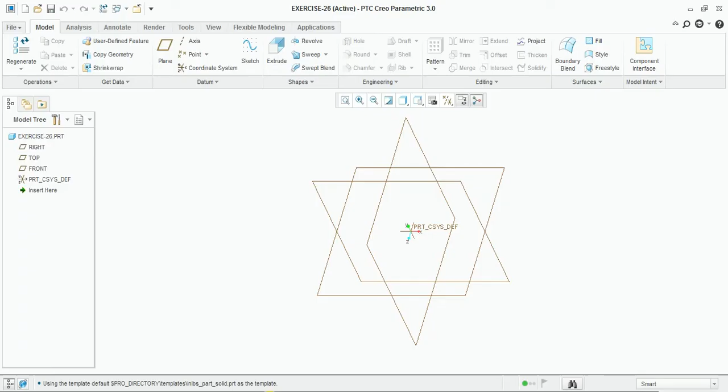Select sketch, select this plane. Okay, now draw the rectangle, dimension is 60 mm. Half of 60.

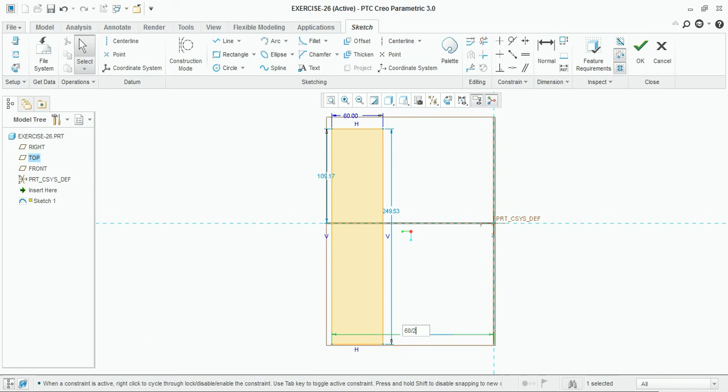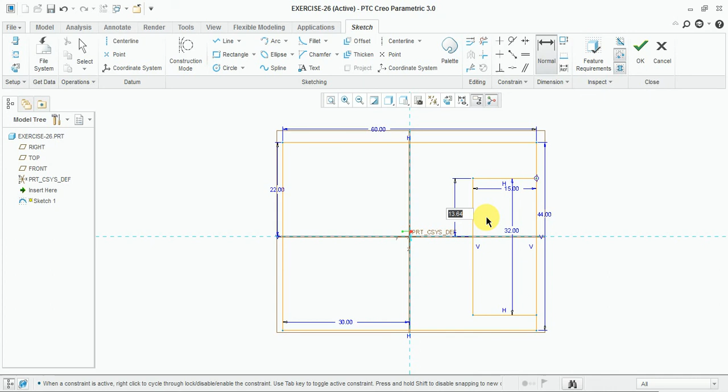Now make another rectangle. Here the slot is given. The dimension of this slot is 32 and height is 15 mm. 32 mm, height is 15 mm. Take into center, 32 divided by 2.

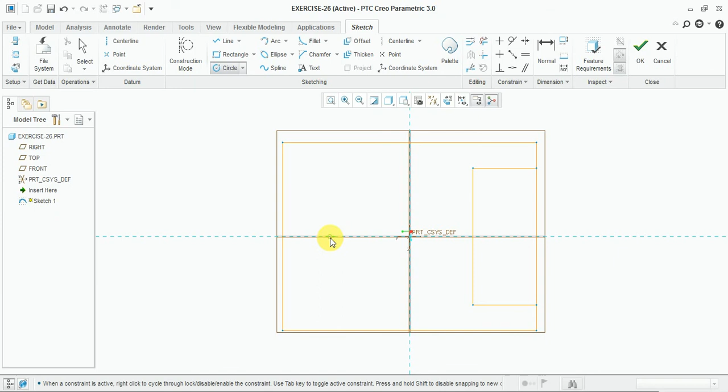Now draw this hole, diameter is given 30 mm and hole center from the bottom edge is 38 mm. Select the circle. 30 mm diameter and center from the bottom edge is 38 mm.

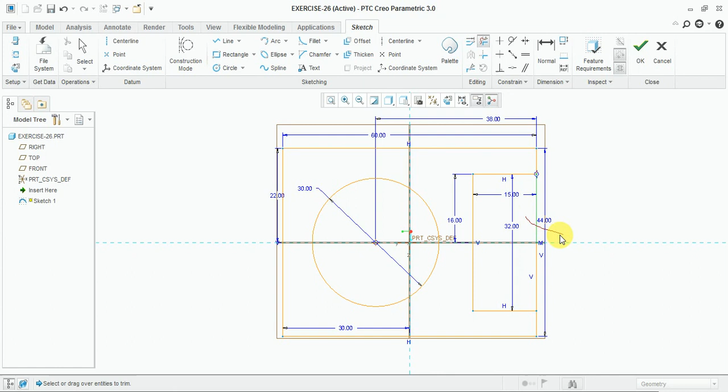Select the trim, cut this line and make the close sketch. Okay, select extrude up to 48 mm and take it into center.

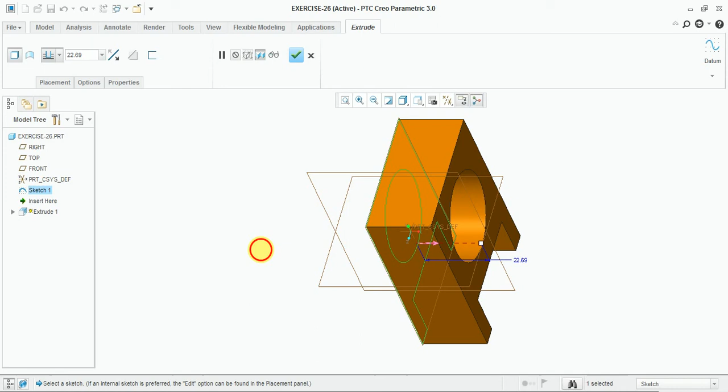So select the symmetric option. Okay, now make this both edge corner radius given 22 mm. Select the round, with the help of shift, enter 22. Okay,

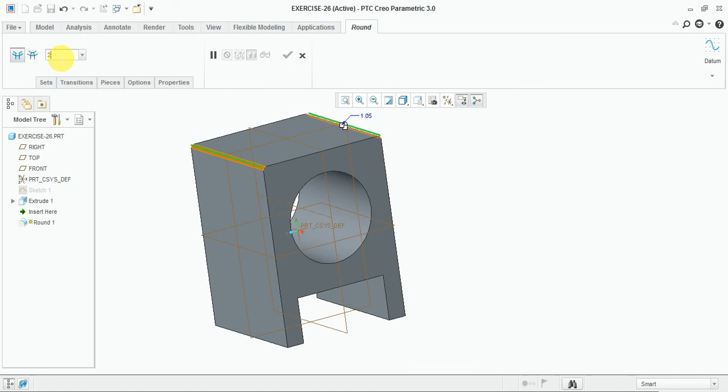change the appearance. Now make this square features from the center line. Both the ends of the square is 64 mm, so half of 32 mm. Take center 32 mm from one side.

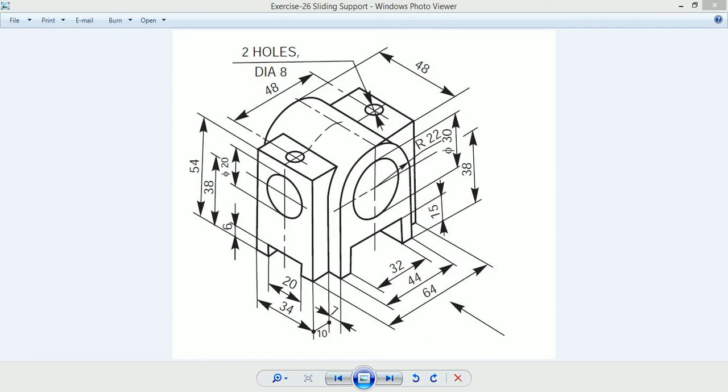Select plane, select this mid plane. 64 divided by 2. Okay, now sketch on this new plane. Draw the rectangle 54 by 34.

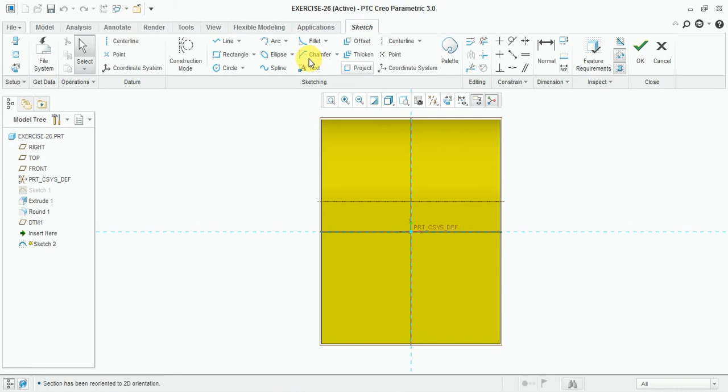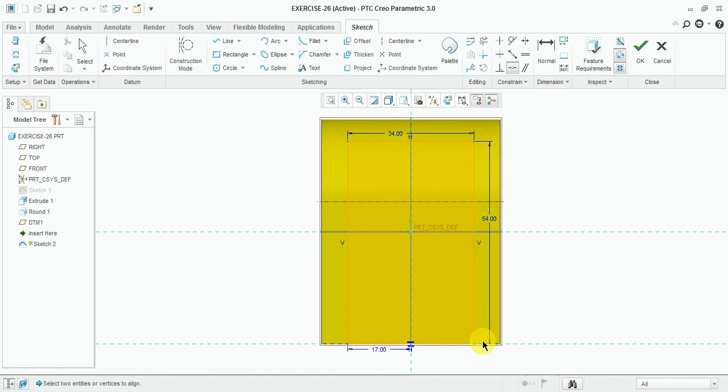Select rectangle with the dimension 54, 34. Now this one is 34 divided by 2, and bottom edge connects with this. Okay, select

extrude opposite direction, select extrude up to this radius and this vertical surface, select extrude up to, next, okay.

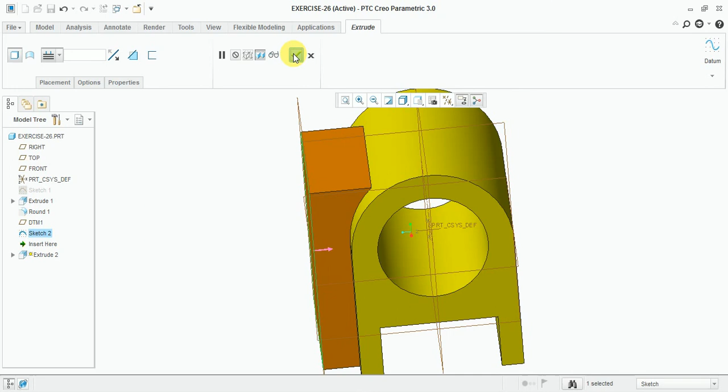Make this hole, diameter is 20 mm and 38 mm center from the bottom edge, select circle, select sketch, select this face,

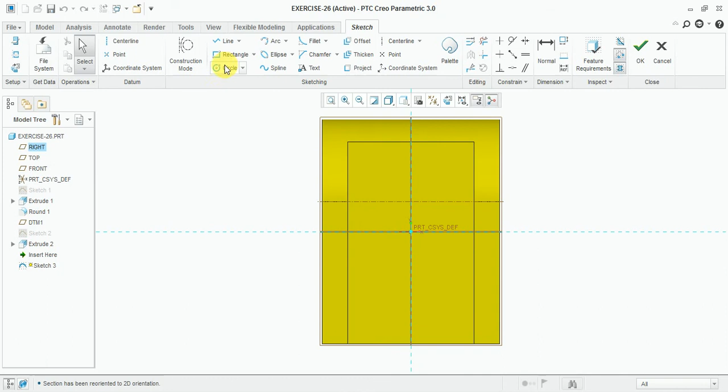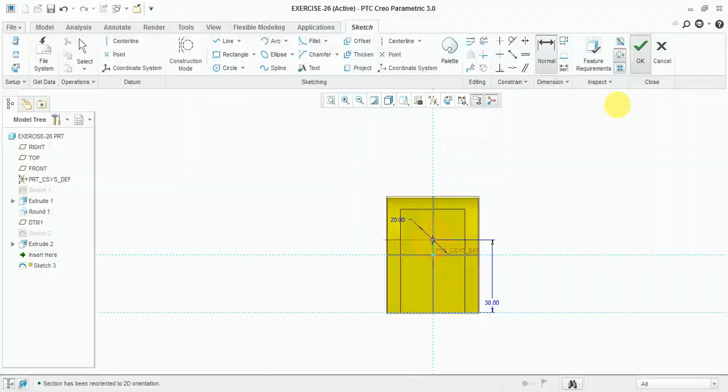hole diameter is 20 mm from this bottom, 38 mm, okay. Extrude, select extrude opposite direction and up to, select the inner face, okay.

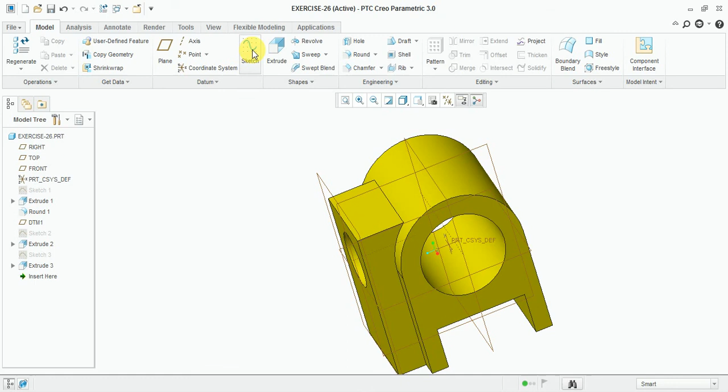Now make this hole, the hole center from the center line is 48 mm, and hole diameter is 8 mm. Select sketch, select this face, okay.

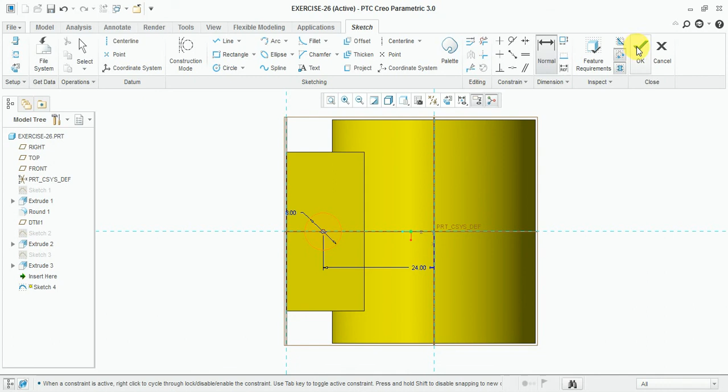Select circle and make here, draw here this circle, the diameter is 8 mm from the center line, 48 divided by 2 is both circle center distance. Select extrude opposite direction, select to, next,

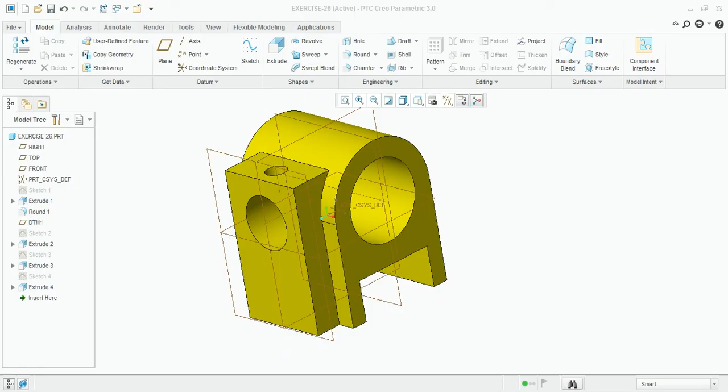now make this slot, dimension is given 20 mm length and 6 mm height, select sketch, select this face, okay. Draw here the one rectangle, dimension given 20 mm from the center 10 mm and height is 6 mm,

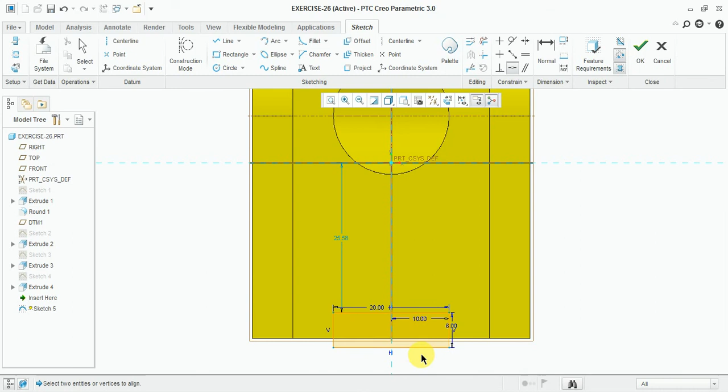select coincide, select with edge, select extrude opposite direction up to selected, select this face, okay.

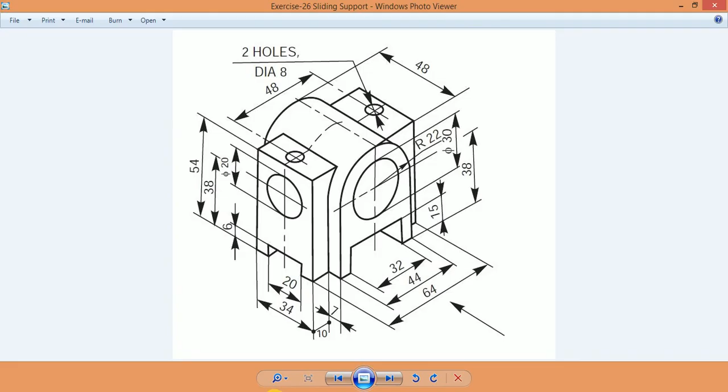Now all these features mirror to center plane, select all, mirror, select this plane, okay. Hide this one,

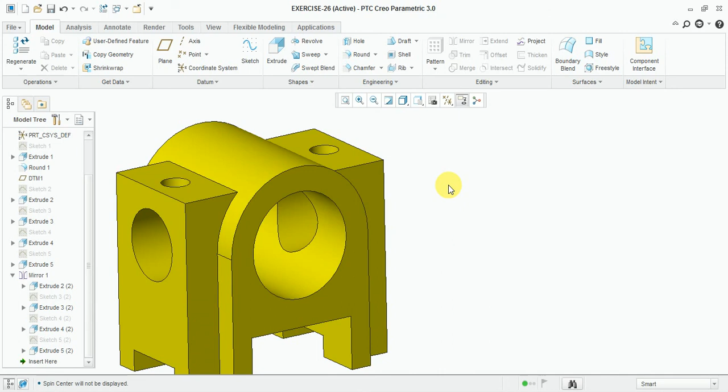now our exercise is done. Thanks for watching these videos.